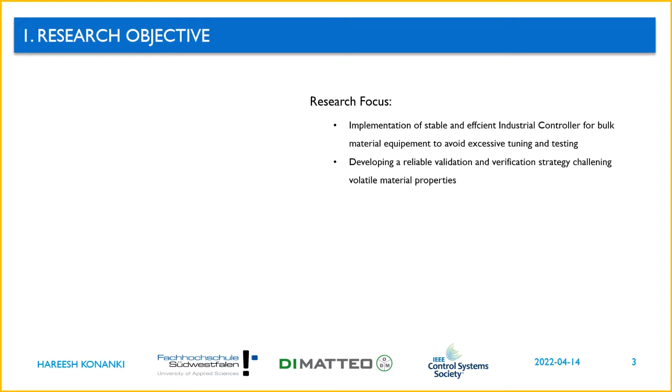involves excessive tuning of the controller parameters and testing at various test scenarios and conditions. Even though one could succeed to develop such a controller with considerable efficiency, the same cannot be promised when the machine handles various materials with volatile properties. It is the same focus for us with one of the bulk material equipment of our focus, which is the gravimetric plate dosing conveyor.

However, due to the availability of robust simulation software, we make use of it in this research to focus on developing a model-based simulation framework for real-time simulations, which would also help to assess the machine performance testing with various materials. In addition, our proposed solution is to develop a novel approach for the evaluation of controllers' performance, about which I am going to discuss later in the presentation.

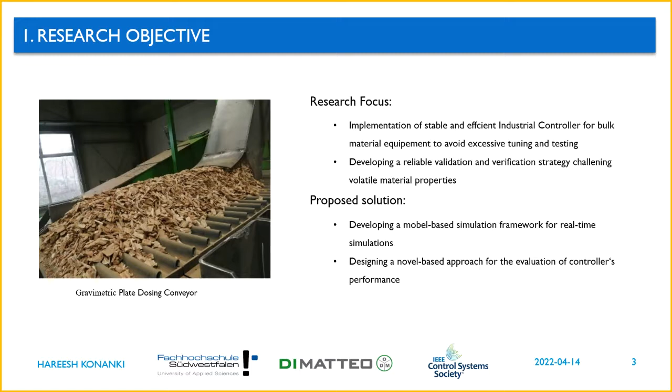So now let us start with the physical modeling of the gravimetric plate dosing conveyor, which is going to be the main focus. The gravimetric plate dosing conveyor is a type of conveyor where the conveyor is formed by metal plates attached to a chain link. It is designed in such a way that it handles various bulk materials from homogeneous to non-homogeneous.

A sophisticated weighing system is designed to measure the mass per length of the conveyor to determine the output mass from the conveyor. It is so important to do so because the machine is going to be operated in energy intensive industries where the output mass flow has a critical role to play. Thus, the output mass flow rate should be controlled very accurately.

Two weighing stations have been established in such a way that each plate of the conveyor rolls on it so that the load cell can capture and calculate the weight or mass per unit length. Using the other dynamic properties of the system and from Newton's laws of motion, one can easily determine the output mass flow rate.

As you can see here, the difference of mass coming onto the measuring length and going out of the measuring length plus what has been lying there gives us the actual mass on the measuring length at each iteration.

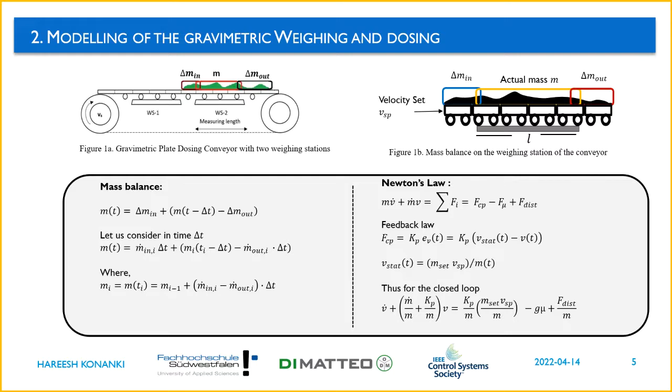However, this is a raw calculation under no influence of controllers, but under a control architecture, one can eventually regulate the mass flow rate by controlling the speed of the conveyor and the input material flow rate, which will be discussed later in the presentation. But for now, let us keep our focus on a validation of the current physical model.

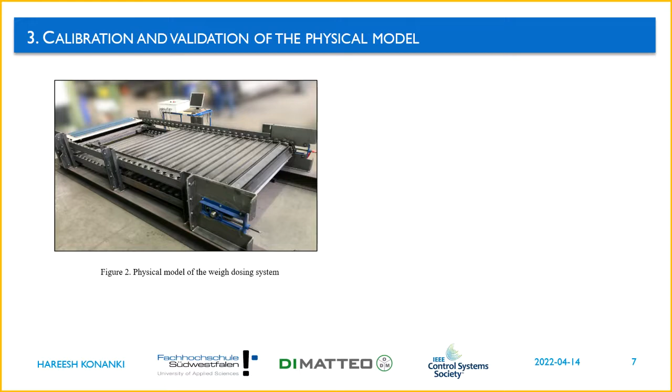As you can see here, this is the physical working model of a gravimetric dosing system that has been used for this research. Considering the same material at same operating conditions, various tests were conducted on the physical model and measurement recordings were taken at various speed ranges as shown here. As you can see, it is evident that the conveyor velocity has a direct influence on the measured mass.

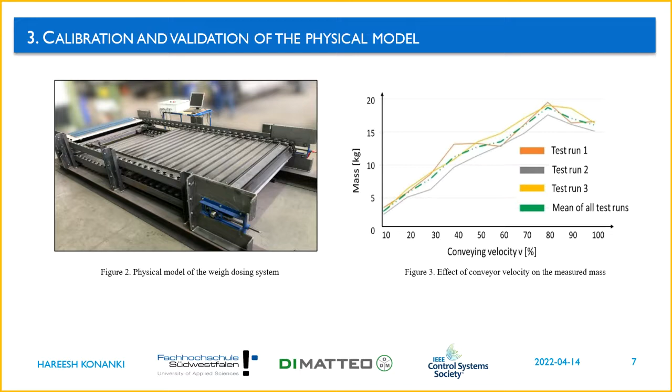For an optimized numerical model of the machine, a statistical model from the real world measurements is introduced, which can be interpreted as a necessary calibration of the simulation. For this work, three different distribution types are considered: normal, log-normal, and Weibull distribution.

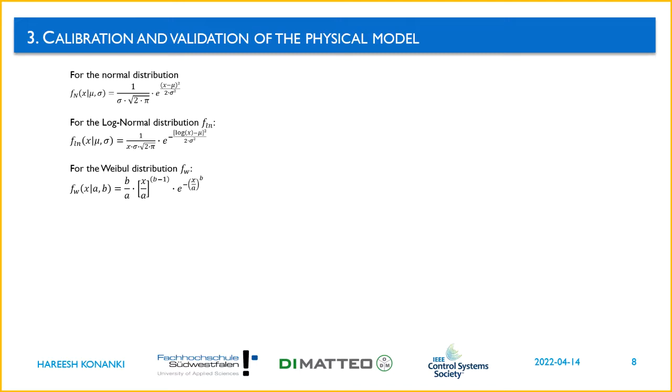Considering various criteria such as the Bayesian information criterion or Akaike information criterion and the statistical value of sum of squared distances, the Weibull distribution was chosen as the best fit to the data and can be used for statistical model development.

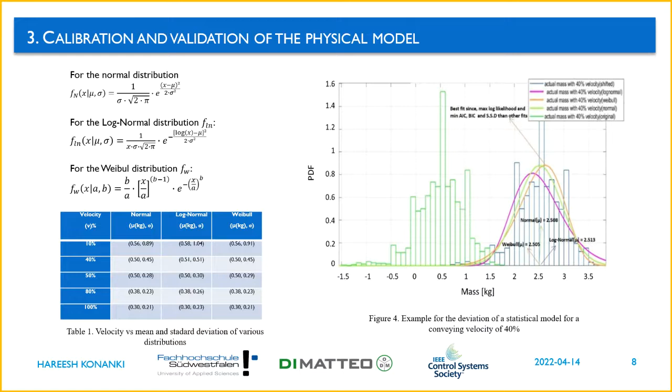On the above plotted distribution curve based on the empirical data, there is a certain influence on the actual mass based on the speed of the conveyor. These curves have this shift of mean value and different standard deviation values for each different velocity, which means this kind of behavior can be modeled within the simulation model by adding an offset as a function of the speed and noise, where the standard deviation is also a function of the speed.

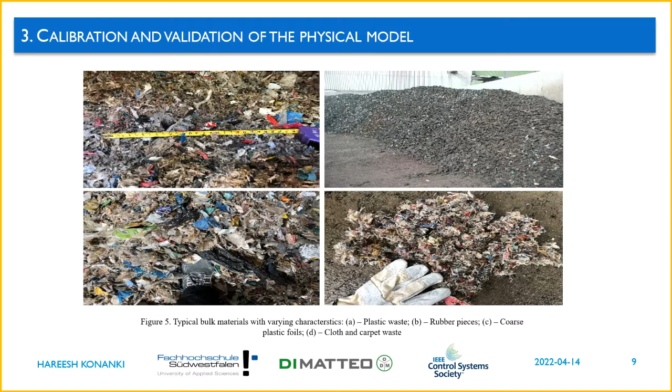To mimic the behavior of the real system, it is not only important to consider all influences on the system itself, but it is also vital to take possible variations of the transported materials into consideration, especially since the applicational background of this work deals with the usage of the system model for process applications such as cement manufacturing. The figure here provides a visual representation of bulk materials with varying characteristics which are usually used with the described mission. Let us now move on to focus on the modeling of the control loop architecture.

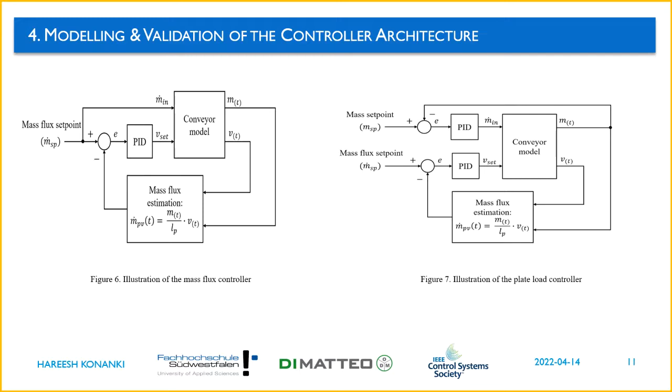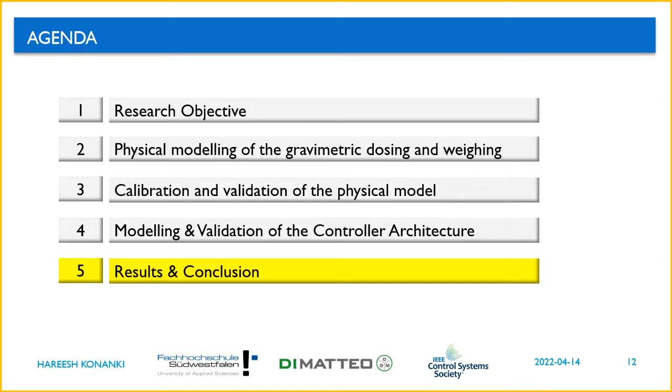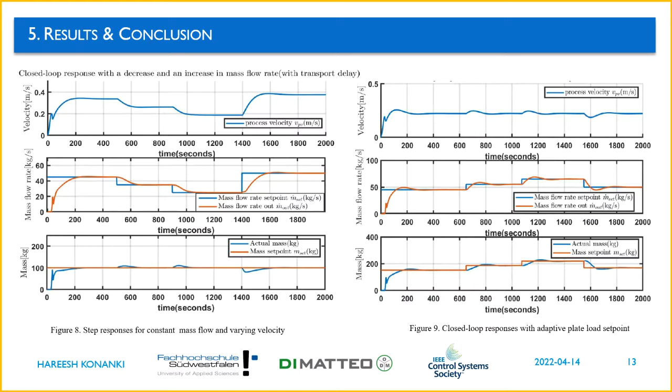In a similar way, the second scenario deals with the inclusion of the adaptive plate mass set point procedure. As it can be seen, the advantage of having a relatively stable conveying speed can be achieved through both controller architectures. The third scenario deals with the introduction of the volatile bulk material characteristics. For this test case, the actual material characteristics are changed at defined times according to their statistical density model. As you can see in the figure, the material changes at 800 seconds and 1200 seconds in a way that the bulk material density and the humidity are increasing over time, and the actual standard deviation of density is also increased accordingly.

However, it is now time to compare the data from the simulation model with the prototype. This helps to assess the performance of both simulation and real-time model. At first, the case is operated at various speeds with no mass on the conveyor. Here, 2000 samples were taken, since the test run lasted for 100 seconds with a step size of 0.05 seconds. The simulation also ran with the same step size of 0.05 seconds to avoid a mismatch between the data points from the simulation and the prototype. As can be seen in the figure, the comparison shows that the simulation is also able to mimic the real system with a satisfactory precision.

Based on the controller parameters found in the model-based tuning, the real prototype was operated with different bulk materials and proved the proposed controller optimization strategy.

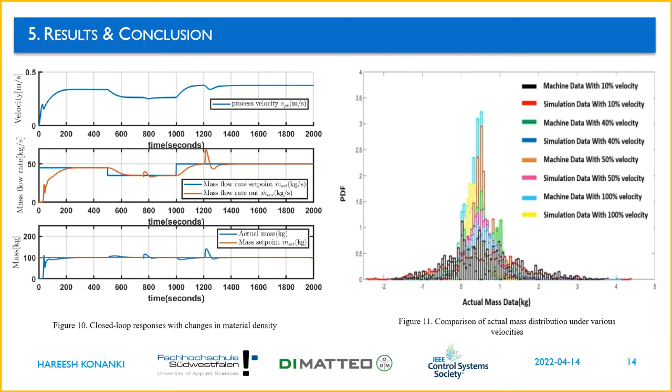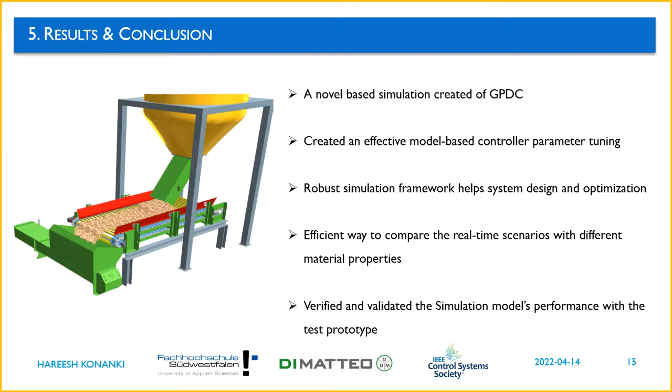Thus, to conclude, to carry out the research, a novel simulation model of a gravimetric plate dosing conveyor was created, and a closed loop control architecture was developed. The robustness of the simulation helps an effective design of the system and closed loop controller architecture optimization. The simulation has also provided a better way to compare the test results with real-time test cases and helps to verify and validate the performance compared with the real model. Hope you found it interesting.